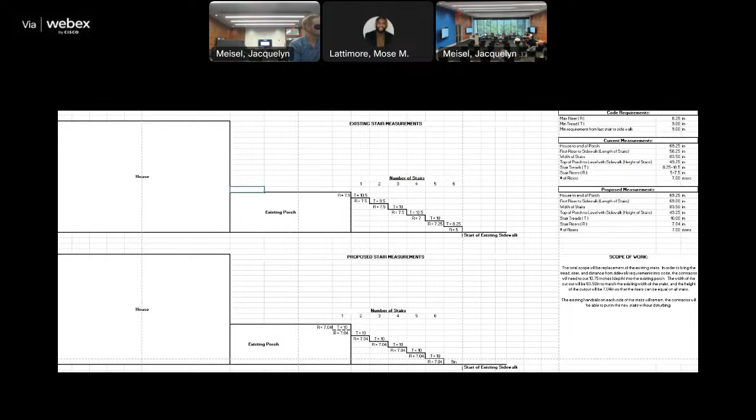So in this meeting, the question was, is that stone or is that laid brick, what is that? The facade behind those stairs. There's the images, the current condition images, from that far left, top picture. We were just trying to understand the materiality of the skirt of the porch, the walls of the porch.

We get it that it's a rental, we get it you're trying to maintain your cost, but what does that plinth that whole building sits on, what is the facade of that, is that just stone, is it concrete block? The house itself sits on sandstone at the foundation, and the whole porch is all concrete, and it looks like there may be some concrete block as well.

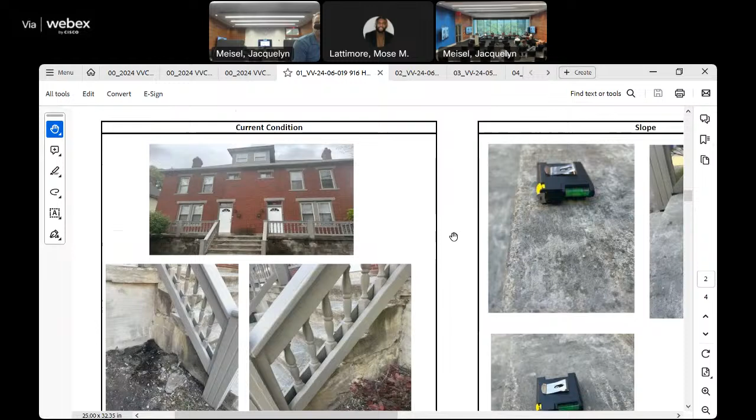If you look at the top picture, it looks like stone, but the detailed pictures look like it's not stone, it's concrete, because there are cracks and block, like if you go to street view. So I guess what is the current condition, is it a concrete block, is it acceptable, is it not acceptable, putting money into this building, what are we doing?

I would say, do you have the additional photos? I don't believe I added those in. There was a good picture of what the sides of the porch look like now compared to that.

So I think what we're trying to do is look at this holistically. I think we understand the life safety components of this, but as you introduce the new, is it appropriate to just leave behind the balance of it? Not necessarily replace the entire porch, but is there a possibility of extending a few dollars to improve the balance of the skirt?

I think that's what we're trying to show with these pictures, as long as it's okay with the commission. Now we see this picture where you definitely see the water table wrap around and connect to the porch. I'll see if I have one on my phone you could zoom in on better.

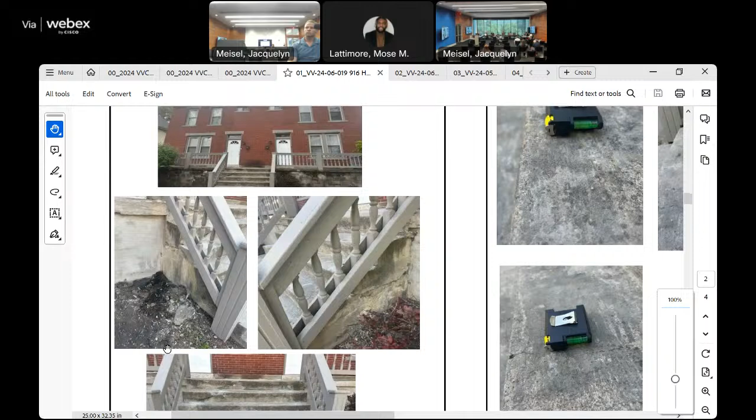Awesome, if you can zoom in on the current condition at the first page, the middle left image. The other thing that's looking a little bit weird is there's kind of a faux cap condition with the decking, the top slab, where the stairs interface with that.

Yeah, the railing isn't code-compliant, so there's just a bunch of weird details. And, you know, I see it's patched, I see it's painted. Is the paint color the same or close to the water table? When they skim the top of this, overall, this could either look really great, or it could look like a rental property that someone just fixed the safety issues and moved on.

And as we treat everyone the same, it's just, I'm not seeing information that substantiates what's gonna happen.

Understandable. So there's a couple of things that stand out to me, and I guess Kimberly, did you try to research any historic photos of this building? I don't think there's too many available in the file. If I remember correctly from doing the staff report, we don't have anything that goes back showing a different set of stairs and a landing.

Yeah, I mean, because what I'm getting at is that this appears not to be original, right? If you look at the facade of the building, well, there's that, the concrete block as well. The facade of the building implies there's something else going on, possibly a covered porch even, but I think we need to understand the context. There's no photos, so we're still limited.

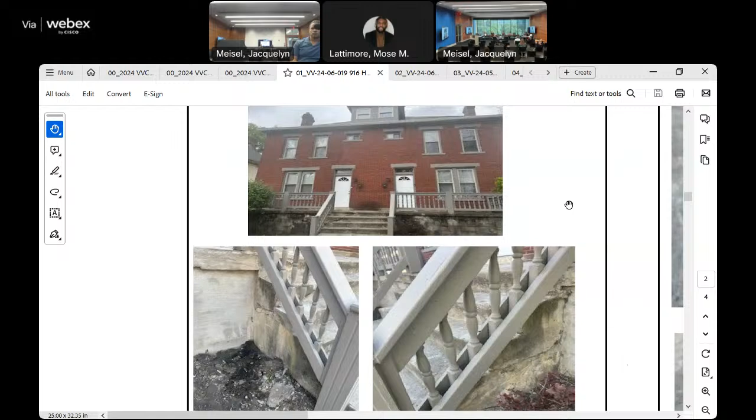Right, so I'm writing things down. Anything else, Pete, from that perspective that you can see that you're troubled by or that you think you need additional clarity on? Okay. Anything, Tim? Yeah, anything more as well.

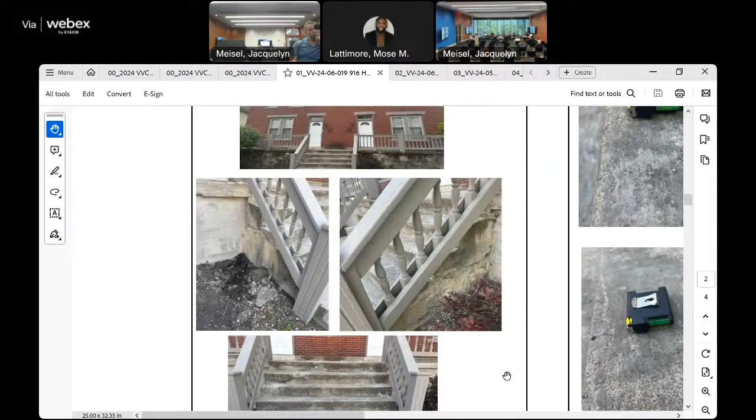Okay, sure. So I guess the concerns in terms of details of the railing, Melinda has a great point, I know the contractor mentioned the hope, but with the new work, it probably will be inspected. And so just being able to address that and what that condition may do, because it's not code compliant now. As soon as you have it inspected, they're gonna flag it. Got it, that's a great point.

And then the transition at the slab, I think pretty much all of us had that same concern, that's what came up in the business meeting. It's kind of that transition there. Is there a possibility of getting some additional detail related to that? We don't necessarily want to say you've got to pour the entire slab, but it seems like that's kind of potentially what may happen if you start to cut and all of a sudden that is all hollow, which it should be hollow.

So how is that transition being accomplished? I think that's the concern here, the integrity of it in the future, thinking about it falling, like a small slab that's depressed, that's new.

So with the compaction over time, will you as the homeowner start to run into issues with that falling and opening up a gap between the existing slab that's no longer supporting, because it's not bearing on the outside perimeter, right?

I think we're trying to guide you through some of the other questions you may want to ask the contractor to give you a better sense of comfort, which would give us comfort too. I can ask him what his plan B would be if it is hollow, and follow up on that. Realistically, if there isn't, I have the option to just leave it as is, correct?

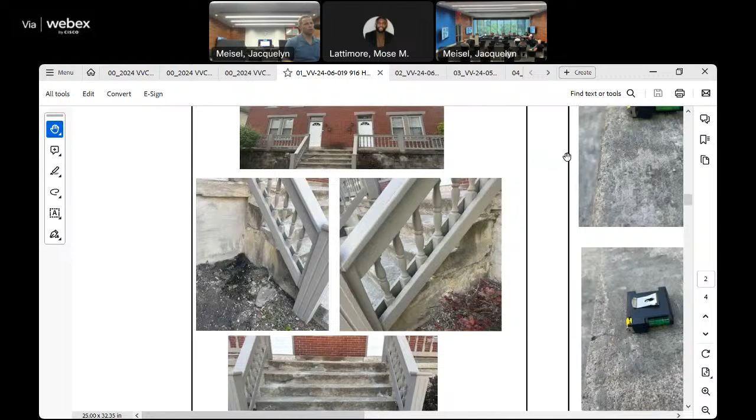So for Claire, for the follow-up: where that little curb meets the stair, clarity on that, clarity on Plan B if it's hollow, what are we gonna do, and then the handrail, which probably just means replacement. Okay, thank you.

Thank you, sir. Really appreciate it.

All right, moving on to application number 2, 851 Neil Avenue. This application is to add a new wrought iron fence with gate on top of the previously approved retaining wall, along the front yard.

The commissioners at the business meeting wanted to know how far back the proposed fence goes from the stone. This can either be noted on the drawings or an updated drawing provided. They also wanted the height of the fence confirmed, as well as the combined height of the fence and retaining wall. The applicant has clarified that the fence would be 28 inches above the ground, and the wall was approved at 21 inches, for a combined height of 49 inches total.

Staff recommends approval of the application with the condition that the updated drawing be submitted to staff prior to issuance of the certificate. Basis for staff recommendation is City Code 3116.13, the standards for site improvements.

Thank you, Kimberly. Can you state your name, sir, and get you sworn in? Yes, I'm Jesse Bianconi. Do you agree to tell the truth and nothing but the truth? Yes. Thank you, sir. Anything you need to add for the application? I don't think so. That's pretty cut and dry, so that's awesome.

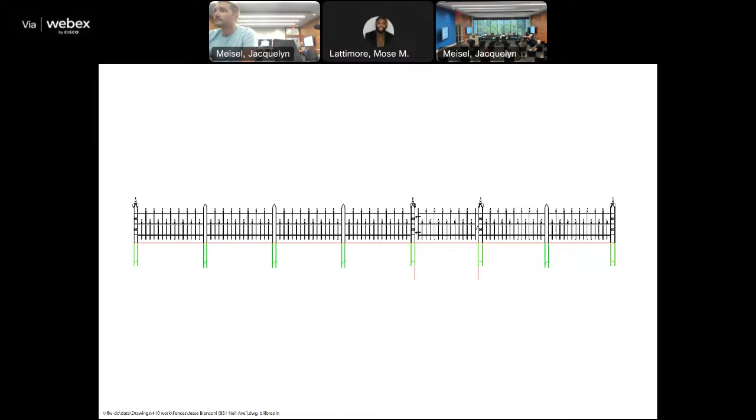I think it would be a much better condition if it were set back, right behind the tree. One, I think it's better for constructability, and two, to minimize the impact. I know there are a lot of conditions throughout the neighborhood that do this, but our concern is we get so many properties that have this very imposing total height of wall and fence together. This strategy of setting the fence back a little helps ease that visual barrier between the public face and the property.

So what would you suggest for the distance to set it back? Behind your existing plantings, I think that would be a nice solution. It would be appropriate where you have two plus feet to kind of knock down that edge and still achieve the enclosure you're looking for. It may work better with the stairs too, because right now it's stepping back to have the gate. You may want to push it farther so it's all one face, though I'm not sure that's a good thing either, but the play with the stairs is worth considering.

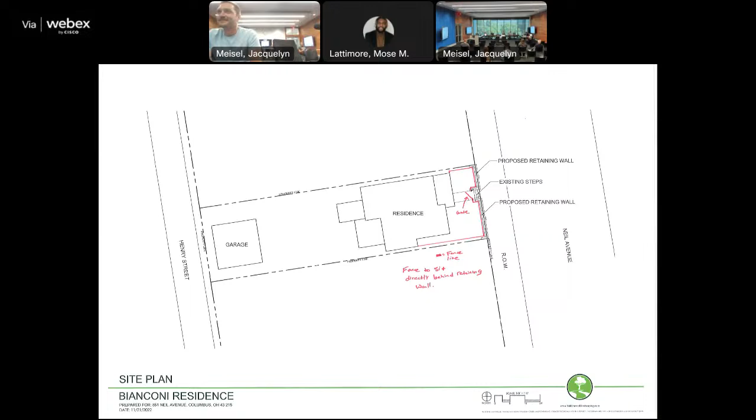Motion for VV 24 06 020, 851 Neil Avenue, as approved as submitted with the condition that the fence is set back from the wall, range of 18 to 24 inches. And updated plans are submitted to staff.

Is there a second? Second. Any further discussion? No. All those in favor say aye. Aye. Any opposed? Motion passed. Thanks so much. Thank you. Good luck.

All right, moving on to application number 3. This is 174 West 4th Avenue. The application is to remove the existing rear deck and construct a single-story addition measuring approximately 12 feet 8 inches by 14 feet 8 inches. The addition will have a flat roof, a single double hung window on the east elevation and 2 double hung windows on the west elevation. Siding is to be Hardie board and batten with a 12-inch spacing. Windows would be Marvin Ultimate, door would be full light Vistagrain fiberglass, and siding to be smooth Hardie panel vertical siding. I have included the commissioner comments from the May 8th hearing.

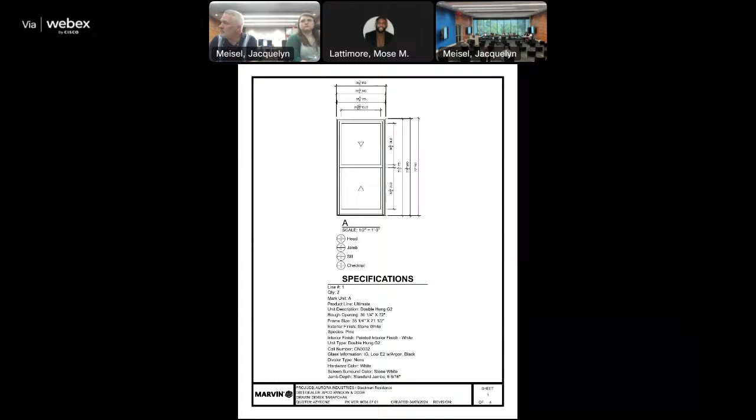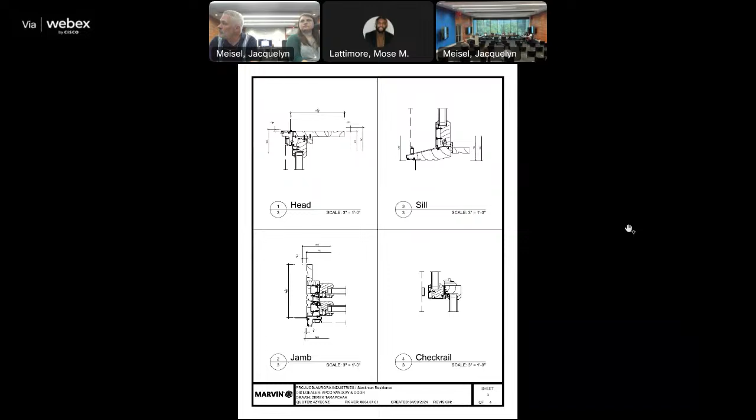Commissioners at the business meeting were curious if the existing piping downspout across the rear of the house would be cleaned up with the new addition. They requested a full site plan with property line, sidewalk, driveway, etc. If any other improvements such as landscaping were going to happen, they would prefer to review it along with the addition. The applicant did confirm, and those drawings should be included in the materials. Staff recommends approval of the application with any and all clarifications to be submitted to HPO staff prior to issuance of a certificate. Basis for recommendation is City Code 3116.11, standards for alteration; City Code 3116.12, standards for new construction; and the Victorian Village guidelines regarding new construction.

Awesome, thank you Kimberly. Can you guys state your name and get sworn in? Pete Foster? Lily Steckman? Okay, do you both agree to tell the truth and nothing but the truth? Yes. Thank you. So is there anything you're going to add to the application?

Really, we just took into consideration the conversation we had the last time we were here, and we made the appropriate adjustments, so we're back. I think the question about the downspout at the business meeting - the mindset was probably that it was uncovered, and that's what the team understood it could be. But I think everything that was a concern has been addressed. As far as the landscaping that was being proposed, I just want to give Tim a moment to digest that and ask any questions. Yeah, that was it, that's all.

So, very clear plan on general material - everything's kind of listed as existing. That's just a concrete patio and a concrete sidewalk is what we're going with. There's an existing paver walk in the front, and that walk breaks off to the right and goes down the east side of the house until it hits the gate. Then we were going to transition to concrete - the desire is to transition to concrete. That transition would happen where the dash line is, right behind the fence, behind the gate, as you go plan north. Okay, perfect.

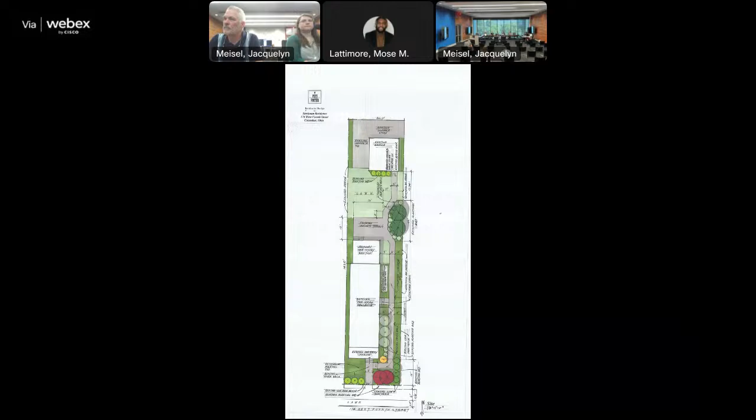All right, awesome. Okay, is there a motion?

Motion on application 24-05-017, 174 West Fourth Avenue, to approve as submitted.

Does that include the updated landscaping? Yes, including the updated landscaping.

Is there a second? Second. Any further discussion? All those in favor say aye. Any opposed? Motion passed.

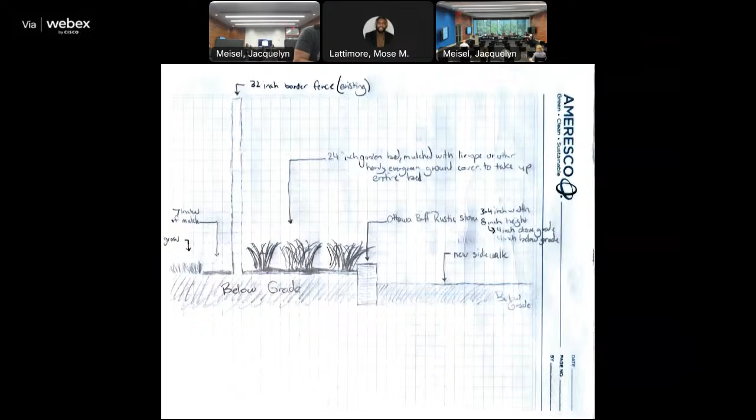Do you want me to write in where it dies into the yard? You guys are gonna write that into the continuation. Should I write that into the stuff I submit as well, or once it's in, do I need to communicate that or not? I don't think so, I think we clarified it would be part of the motion. That's correct. Okay, thank you so much.

Appreciate it. Although I might have to say, since Tim's been doing all these motions, someone else might have to do it next time they get a break. The last one, yeah, I agree. The awkward pause, yeah, thank you.

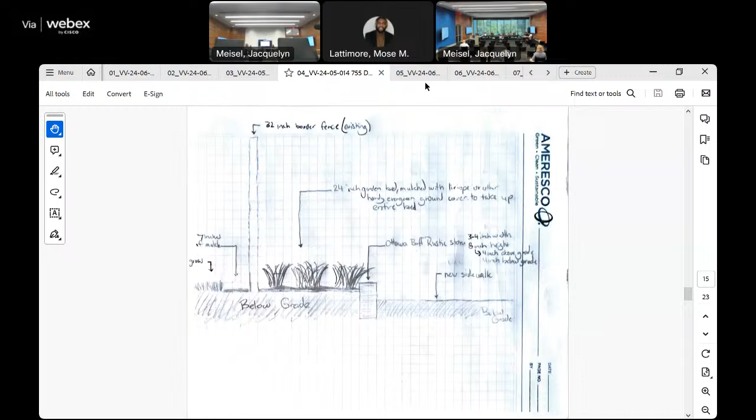All right, application number 5, 111 Price Avenue. This application is to replace the existing front doors with Palmer Donovan fiberglass wrap doors and a full glass sidelight, and to replace the metal full light doors in the kitchen and dining room with Palmer Donovan fiberglass wrap full doors.

As such, it is our recommendation that the original doors are retained as a contributing architectural feature. Staff recommends continuation of the application to allow the applicant to revise it to better follow code guidelines, based on City Code 3116.11, the standards for alteration, as well as the Victorian Village guidelines regarding windows and doors.

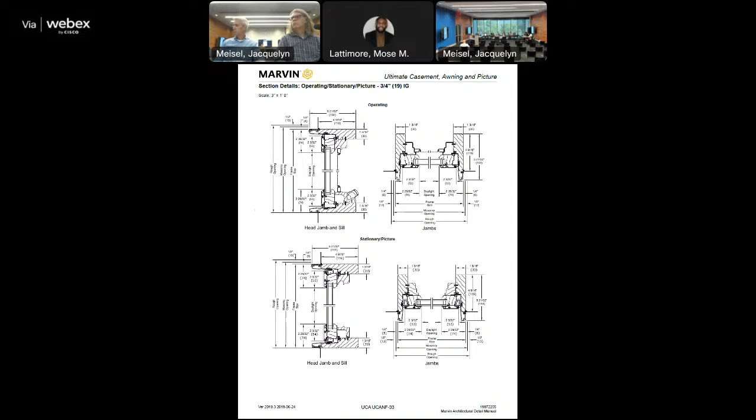I have added the minutes from the April 10th hearing to the meeting. Commissioners at the business meeting noted that the application looked complete and they needed no additional information. HPO staff has added the 1901, 1921 to 22, and 1922 to 1951 Sanborn maps to the materials, which show that both single-story additions to the property are historic and contributing. HPO staff supports the addition, but not the proposed alteration to the historic openings. The applicant also submitted some additional photos of the windows, which they are proposing to replace, as well as...

I was gonna say this is fantastic. See, there we go, the screen just blanked out a little bit. And I got this uploaded today. I was gone for the past week, so they submitted last week on Wednesday, so it was one of those, you just missed me by a little bit.

From a preliminary quick look, it appears that a lot of these windows are old, but they're not original. The ones that do look a little bit older appear to have a little bit more decay. I did not get a lot of time to look over these in detail, and just to note, it's not on the agenda as noting that the doors and windows would be replaced, but it was part of their original application. So if the commission is comfortable with the last minute look at the materials and voting on them, staff's okay with that, but if we would like to do a site visit or any additional work, I'm okay as well, as long as the applicants are okay with that.

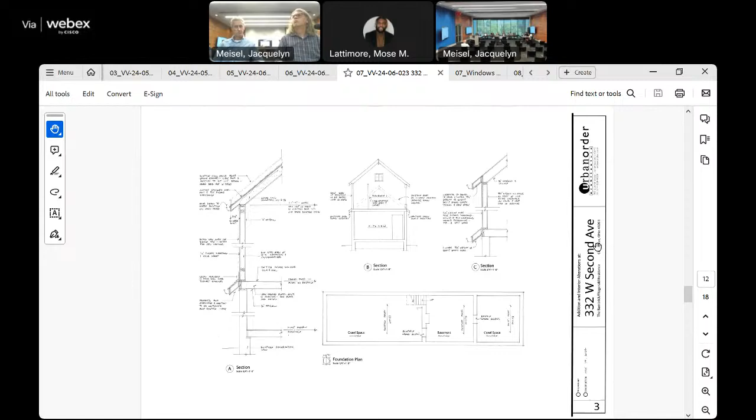My original recommendation was to approve the application with the condition that the historic opening is retained, and basis for recommendation, City Code 3116.11, the standards for alteration, as well as City Code 3116.12, the standards for new construction, and the Victorian Village guidelines on new construction. And Sean, I'll let you swear in.

Okay, thank you. Can you gentlemen state your names and get sworn in? Dean Burlong. Steve Hurd. You both agree to tell the truth and nothing but the truth? Yes. I do. All right.

Yeah, so like Kimberly said, we were here I think in April, talked about this, presented it conceptually, went back and forth on the openings and the scale of the addition and how we stepped it down from the original house. The general consensus from the commission was that it was a positive direction and changing the openings on the back seemed okay. We didn't talk about the windows at that point, but our client does want to replace those windows, and as Kimberly said, a lot of them are replacements. I'm happy to meet with staff and walk through, look at that if you guys are okay with that, or we could bring it back. It's just really up to you guys.

So what you're thinking is that the doors and windows can be pulled out of advancing the application today?

Yeah, they could be if we need be. Especially since when I sent that, I didn't know you were out, so I think you guys didn't get a chance to see it. Kimberly, is that an option of being able to just pull that out? Would you feel comfortable pulling it after the application? I would be, if we want to split it and continue that part.

Okay, I just wanted to be sure before we got too far. Yeah, the rest of it has been vetted, I think. That's why I wanted to turn over to commissioner comments and see if there's anything related to item A, which is going to be the overall project itself, minus the windows.

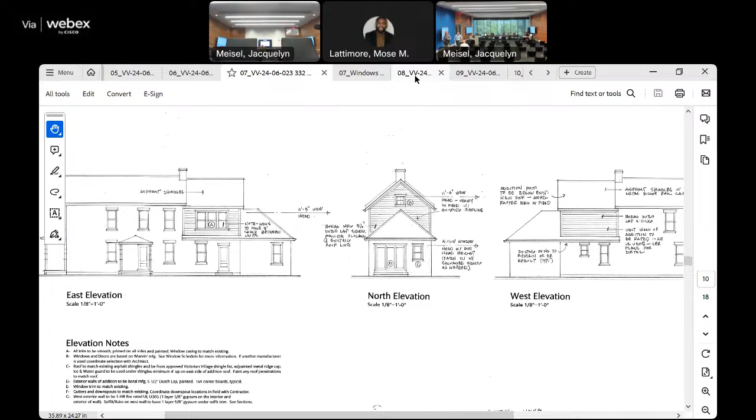All right, thank you, thank you for talking it through. Yeah, and I'll reach out as early as I can to schedule the site visits. It sounds, I'm sure you're small, so we'll figure it out. And nobody lives there, so we have the access for the next business meeting. Okay, that's perfect, so thanks. Thank you, thank you. All right, rolling right along to application number 8.

This is 938 Hunter Avenue, and this application is to remove the existing cedar shingle siding and replace it with James Hardie siding, 7-inch steel in cedar mill color, with Arctic white trim around windows and doors that weren't recently replaced. Corner boards will be Arctic white, with standard doors, windows, door heads, sill flashings, and new standard mounting blocks.

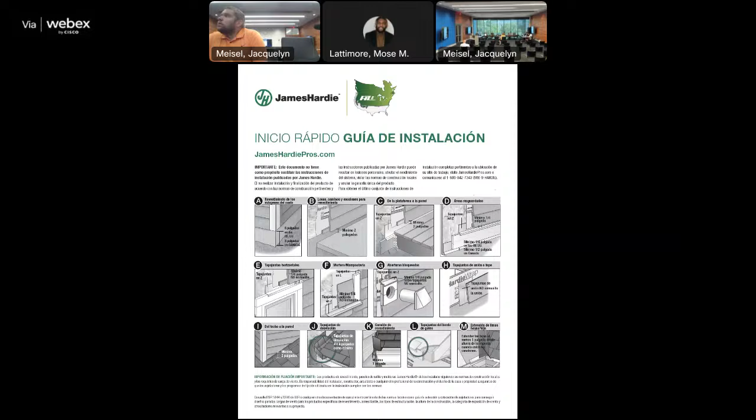The commissioners at the business meeting suggested a larger test area to evaluate the original siding conditions submitted. Commissioners noted that going back to the cedar siding or dimensions of the original siding, typically a board and batten, were typical requirements for siding replacement, but noted that before they could consider replacement, they had to evaluate if the existing or original siding could be restored.

HPO staff conducted a site visit, and from the test patch it did appear that the original wood siding is in good condition. Staff would recommend either repairing or replacing the cedar siding, or restoration of the original siding. Window trim on a portion of the building has been replaced without approval, and the applicant is working with staff to resolve the work already completed. I'll note there are a couple of communications in my queue that I need to get back to him regarding that topic as well.

Staff does recommend continuing the application to allow the applicant to conduct a test patch in another area to verify the condition of the original siding. The basis for staff recommendation is City Code 3116.11, the standards for alteration, and the Victorian Village guidelines on siding.

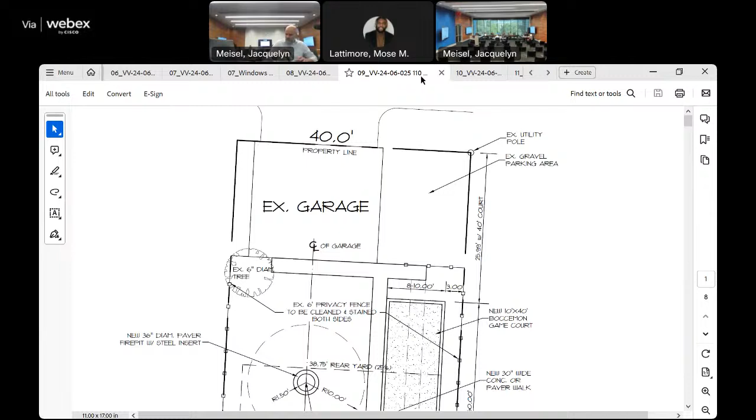Jeff, we'll give you a report. Y'all get distracted, you don't focus on the applicant nearly as much, and I'm not saying you individually, but in previous iterations it has not done well. Previous commissioners, I will follow up with you, I'll try to save some of the goodies. Beautiful, thank you. All right, but it's been a pleasure, Commissioner Hisson. Thank you, I've enjoyed all 27 years. Oh, I'm sure, all the ups and downs. Yeah, absolutely.

Okay, so for application 110 West Second Avenue, the request here is for landscaping: installation of a 13 by 13 foot paver patio and a 13 by 13 foot prefab gazebo structure with a hot tub, that would be below the rest of the existing deck, per the submitted documentation.

We'll be installing a new paver or concrete walkway and removing the existing walkway, and installation of a bocce game court.

That bocce court would be constructed out of 2 6x6 foot pressure treated stacked lumber with 24-inch number 5 rebar at 6 feet on center and a 2x8. The infill would be clean crushed rock and perforated drain pipe, overlaid with landscape fabric, with the addition of a 3-inch layer of crushed limestone and topping with 1-inch oyster shell blend.

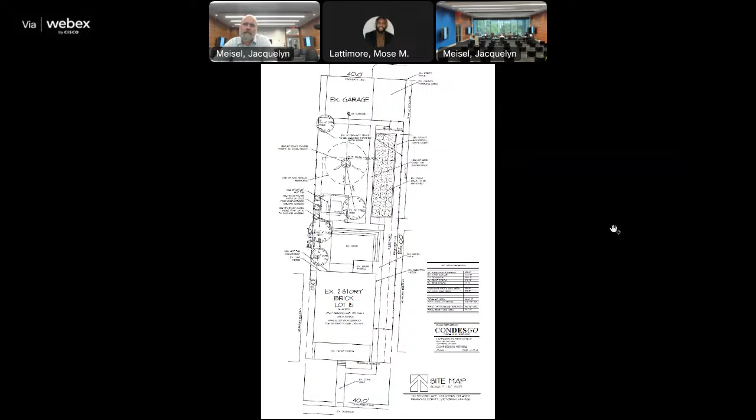100%, makes sense. I think the other thing with something like this, it's a structure, so seeing it in relationship to adjacent structures, a second elevation of the house next to it, what is its proximity to the neighbors, those are really the critical things for evaluation of its appropriateness, in addition to material.

That's very consistent with what we evaluated last time. I think the things we pointed out about why looking at those types of drawings helps the homeowner understand some of the complexities they were proposing. Not to say this case is the same, but it helps the evaluation.

It's not an umbrella covering your hot tub, it's actually a structure, which triggers a whole bunch of other things. So, anything else? We addressed the gazebo, was there anything related to the hot tub? It didn't seem like it was.

I think that was just more product data, but that's been offered. And then the site plan materiality in terms of the bocce court, is there any concerns about any of that?

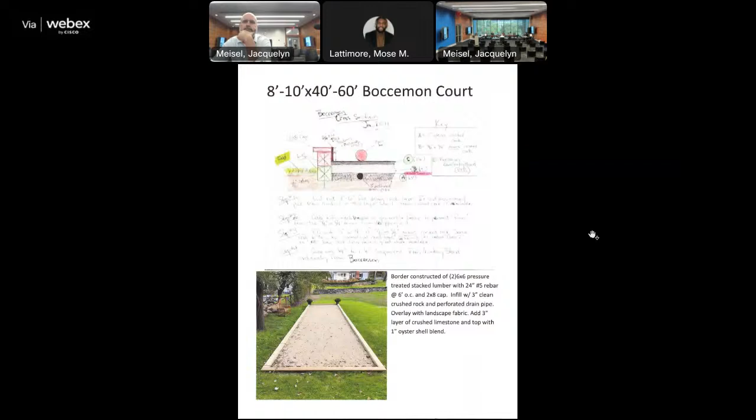The only comment I have is about the pressure treated wood. We usually say no on the pressure treated. But this still is black. No, it's stained black here. Okay, oh, so you have the one, okay.

And what it's for, I agree. I just want to make sure we're not doing anything out of it. Right, yes, of course. You could theoretically just line the inside with wood for the bouncing, you know. They put stained black.

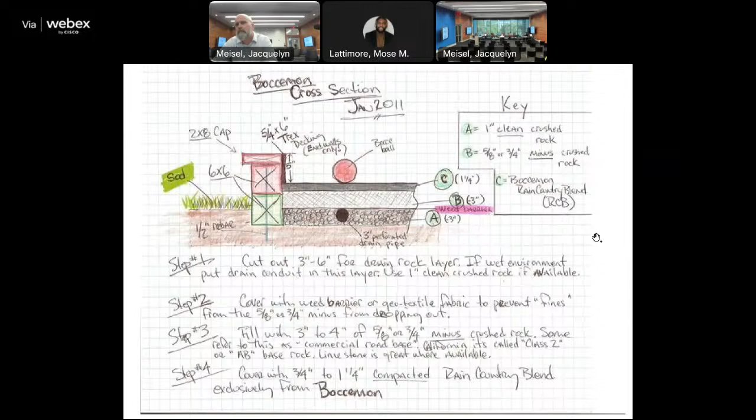My only observation on the site plan is that the circular area for the fire pit, its relationship to that adjacent walkway, is a little awkward. You kind of get some weird leftover spaces. So if this is going towards a continuation, just consider what that connection is between that space and the adjacent walkway.

So is the best path a continuation to allow you to work through those items? So your request is that I do full elevations of the existing house with the gazebo? I don't want full elevations, I think it's more so a scale relationship of the elements. It doesn't need a lot of materiality from that perspective. It's about allowing us to understand the relationship of the mass of the thing against the home.

So however you can best communicate that, I think is beneficial for us. Is the elevation of that neighbor where the hot tub is just a solid wall with no windows? Is there a window right in front that they're gonna have to look at the structure? Just basic context of where that thing lies.

Some images of the adjacency may be helpful too, the property line, or a fence, and being able to understand the scale of the homeowner's home is what we're trying to do. So if I superimpose the image of that gazebo onto some photos that are already available?

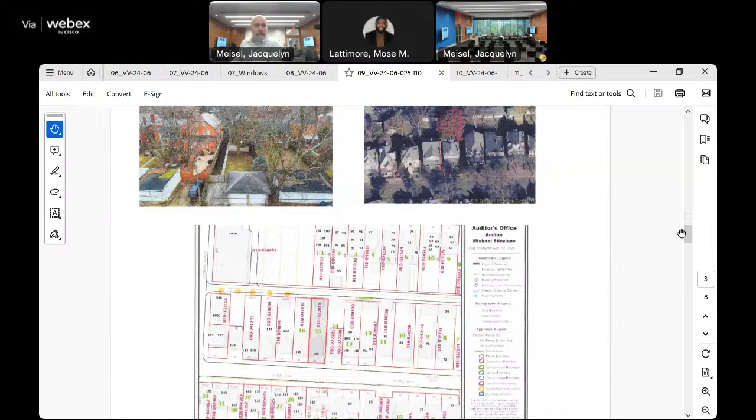We talked about the bocce wood, but I don't think the bocce court's being stained—I think it's just the fence.

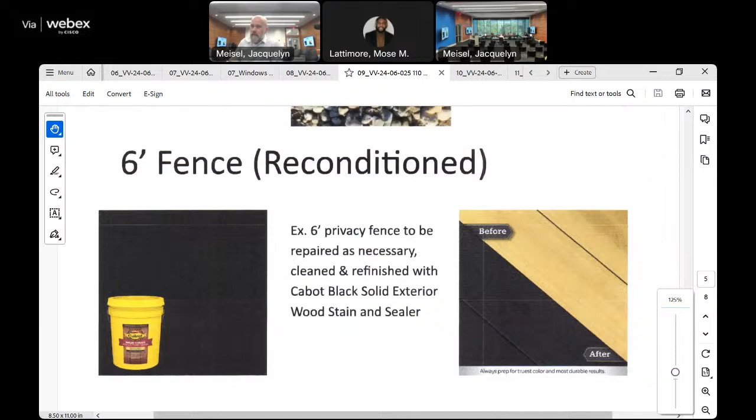In the application, what was referenced was the repair. I don't think the paint was mentioned—maybe it was, it said it in the last bullet. The intention was to do both sides, including the side that faces your neighbors.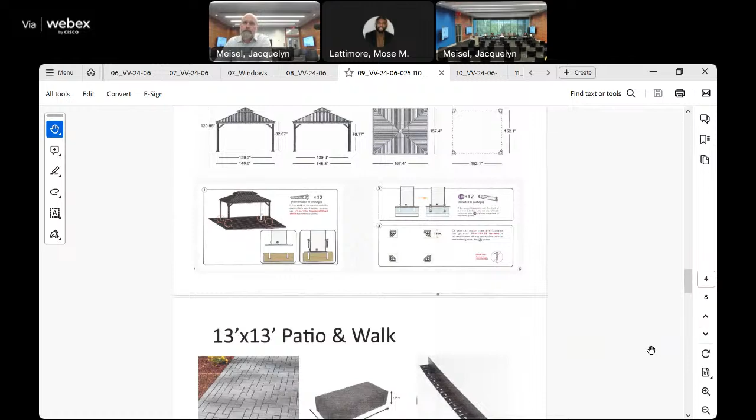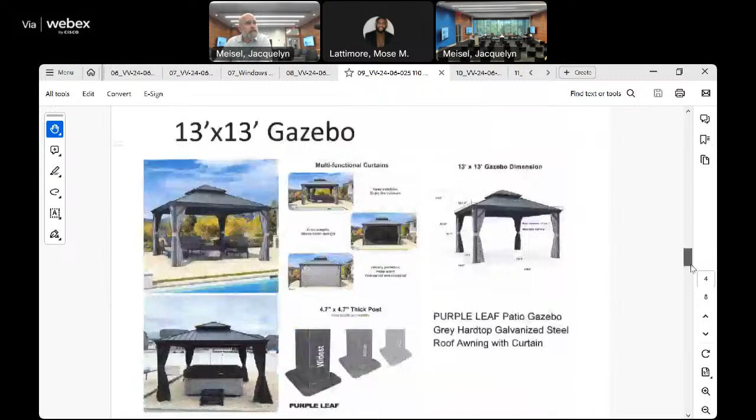No issues with stain, but that dark color—I don't think there's any wood with a solid stain like that, it seems a little intense. Just trying to think if there are other examples.

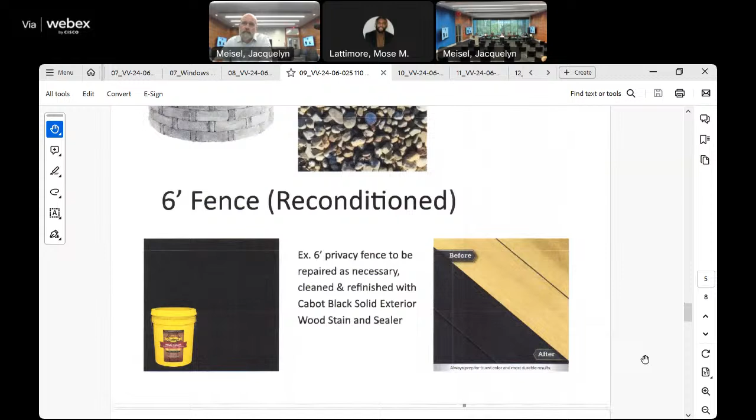Can you help us with an alternate to that solution? Thank you for pointing that out. I think some of these things are just new for us from that perspective, so I appreciate you navigating this.

I think an alternate would be helpful for us. I think the staining is appropriate, and I think staff would echo that, but it's just the depth of the color. If it got to that point, the stain is something we could pass off to staff.

Ultimately, we could approve it being stained, then refer the appropriate color to staff. My gut is that black would probably be too much. I agree.

Good, you got it—I think we touched everything. I think so. Okay, thank you.

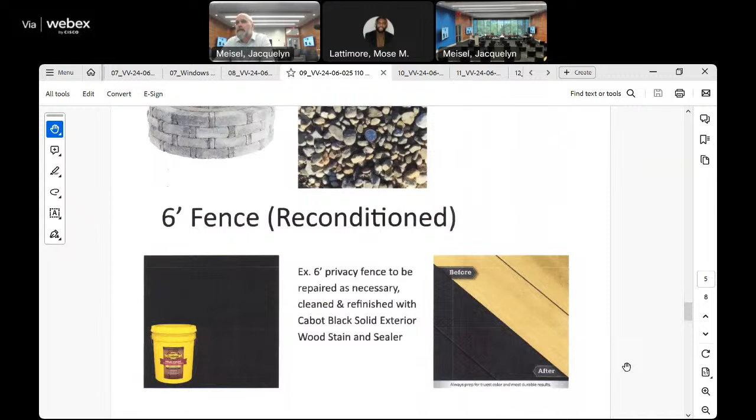Is there a motion to continue? Motion on application VV 24 06 025, 110 West Second Avenue, to continue the application. Is there a second? Second. All those in favor say aye. Aye. Any opposed? Let's continue. Thank you.

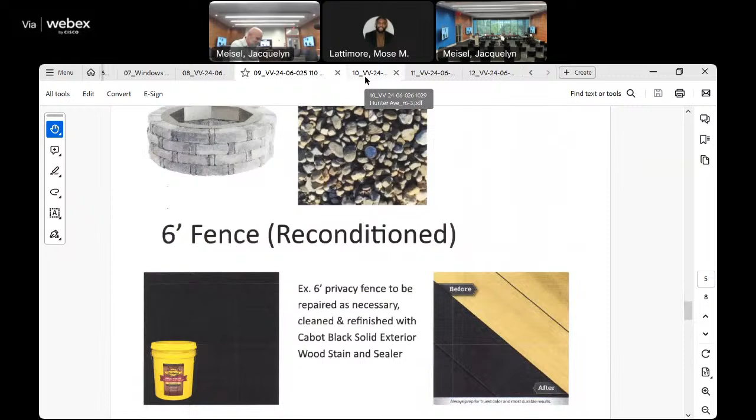Kids, I'm leaving, good luck. I don't want to stay through the rest of the meeting. I told Kimberly I'm taking this—I'm pretty sure he said he'd blow it up. I'm gonna have them on, I might even do my Christmas card, maybe make note cards, I don't know. Well Jeff, good luck you guys, thank you for your service. It's been a ride, I truly appreciate it. Always hear good things about it. Bye you guys. Jessica, you won't have to deal with me ever again. Thank you guys.

Moving on to application number 10, 1029 Hunter Avenue. The proposed work is to remove existing asphalt siding and restore the original wood siding underneath, and to construct a new two-story addition on the rear of the house, demolishing a portion of the historic house for documentation. The addition materials would be HardiePlank lap siding, Pella Reserve traditional wood clad double-hung windows, CertainTeed Carriage House shingles in Stonegate Gray, and ogee style gutters. At the business meeting, commissioners noted the application was complete and needed no additional information.

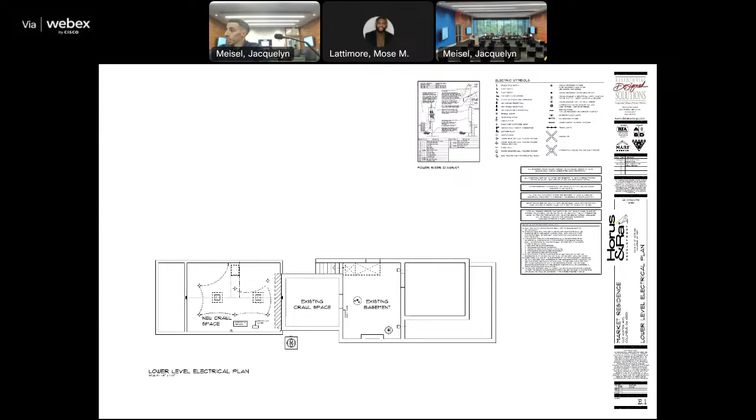Staff has additionally added Sanborn maps, which help show the location of the historic addition. Staff recommends approval of application VV 2406026 at 1029 Hunter Avenue with the following conditions: that the addition is lower than the height of the original structure so that it is subservient, to be consistent with city code during construction, and that the historic addition is retained.

So the basis for the staff recommendation are the city code 3116.11 standards for alteration, and I think that would also include the standards for construction. And with that, I'll turn over to the commission.

Thank you. Can you state your name, sir, and get you sworn in? Yes, Kareem Ammer. Do you agree to tell the truth and nothing but the truth? I do, yes. Thank you, sir.

So I know at the business meeting you were present, I think I remember, right? Is there anything that you want to kind of talk through related to the application and the thought about staff's recommendation of the historic addition being retained?

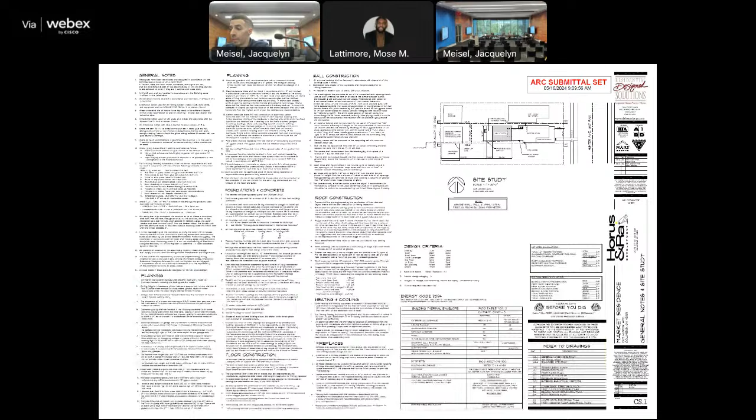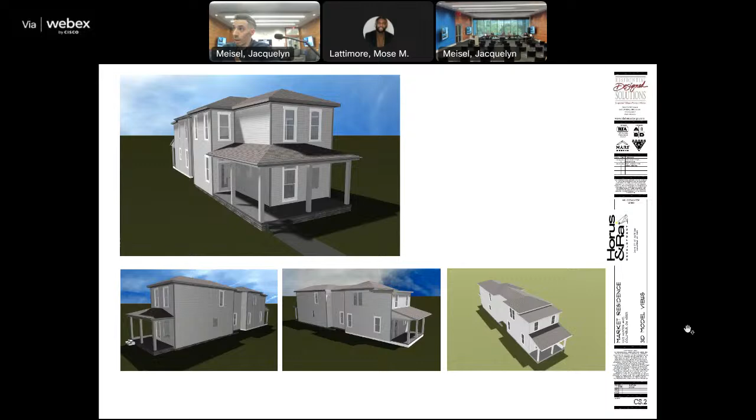Sure. Yeah, just to provide a bit of context and talk this through since the last time we were here. We were here a few months ago, I believe, bit of new faces since that. So again, to provide some context, this house as it exists today is vacant, distressed, has been for a while. Our previous submission showed some pictures of the interior, and while that's not up for consideration, it shows just the true condition of it. It's really a heavy lift to bring this rather sad house back to life in this neighborhood.

Siding that exists today is asphalt shingles. That's not the original siding. We'll be restoring the lap siding underneath, again trying to bring back some of that original character into the neighborhood.

With this submission, we really cross-referenced all the constructive comments the commissioners gave us at the last hearing. Most notably, I think the one that resonated with us was that our last submission resembled that of a semi-truck, and we took that to heart. I think the architects did a great job with this submission, adding more hips to that addition that are in line with the original house, more of a distinction between old and new, and making that rear porch more in line with the character of the original house.

So again, really no gimmicks here, just trying to incorporate the feedback that was given to us to the best of our ability. That condition, I guess, is new to me to hear. I didn't receive that in the feedback in the email. I guess if we don't mind talking that through, the implications to the design we have today - what that means. So we're asking for the height of the addition to be lower than the historic addition, essentially that portion in between there in the middle. Or I guess any clarity on that condition, just so I know for certain.

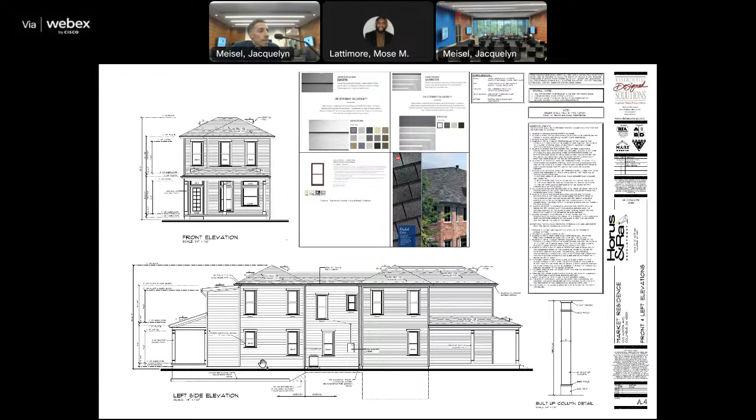Understood, right? See the top of that window, well, the whole window is... So I guess that is in the existing, but on the drawings it says that's being reframed. And if it's an existing window, it's lower than... Looking at that side, the window is getting slid over from where it exists now. So if it's being slid over, then the head height should remain the same. If you look at page 20...

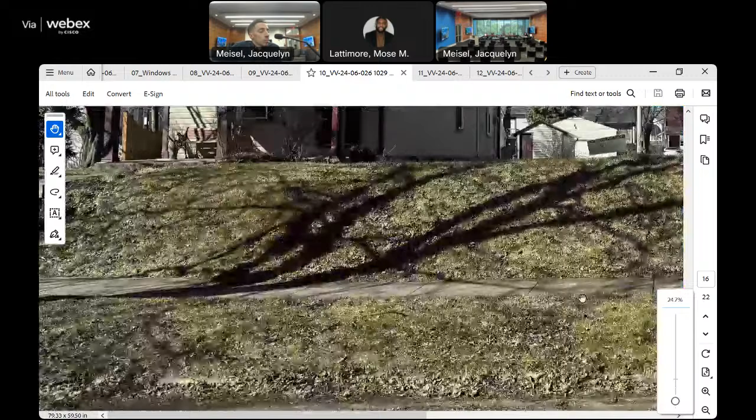There's a picture of that facade. Is it all the way to the left? See how the head height... yeah, it's the same, is higher. So maybe there's just a problem with the drawing. But the head height wants to be up. Yeah, I agree. Well, that back roof, I think, slopes down and that window is lower.

But is that roof being reframed? Yes, but the window is not being reframed. Yeah, it is, on the drawing it should be. Oh, because it's shifting. Okay, jeez, all right. That's understandable, it's a good observation. Oh, right, I see, okay.

So I think that we have the window elevation on the existing. We talked about it, it does meet the intent of, I guess, stepping down or identifying a sense of separation from the existing standalone home. Do we need to talk about anything else related to the application, siding? The addition or the historic addition? The addition, the historic addition, there we go, thank you. So the historic addition, any thoughts related to that? I think staff's recommendation is that the historic addition remain.

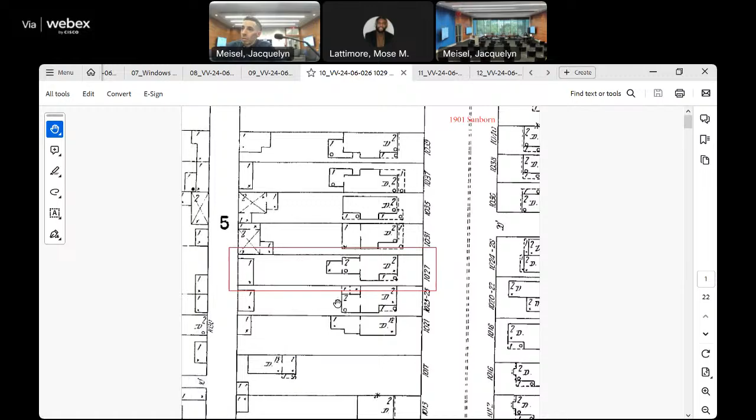Okay, that doesn't exist there on the structure today, I don't believe. It's in the pictures, is it not? Not the one that's on the 1901 Sanborn, but... Well, that's the funny thing. It's on the earlier Sanborn, but not on the later Sanborn. Well, yeah, that's odd.

I don't believe there's just the one story. The second Sanborn is the right size, whereas the first one is much deeper than what's currently there. Yeah, so it looks like it was probably replaced with a porch, and then the porch was enclosed.

I can see that. So I think if we're looking for a justification, it's part of the house that has seen a lot of change over the years. That's right. I like that, and that they're keeping it 90%. Right. Well, and I don't...

I mean, in terms of this addition even fitting in with the style of the house that it's on, with the window, the style of the windows and the doors, it's not even complimenting the building as is.

That gets us close enough. Yeah, I mean, I think that we're going to have to say something like that in the motion, just from that perspective, just to give staff an understanding of why we're making this determination.

Yeah, which is very confusing. Yes, it is. Does everybody have clarity now though? This is a big... I don't want to force anything on. Okay, yep, clear. Okay, so we talked about the addition.

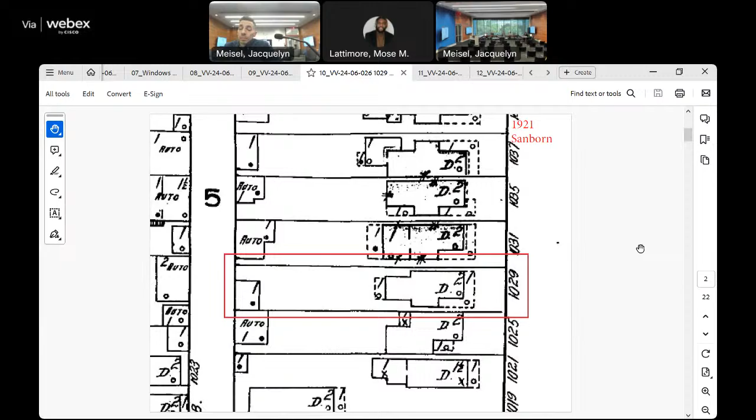The historic addition, we talked about this. Go ahead, I'm sorry. No, I'm sorry, I have one thing to ask, goes back to that window, just again for consistency. Right, we're not really infilling a window, but we're moving a window around in the historic part of the structure.

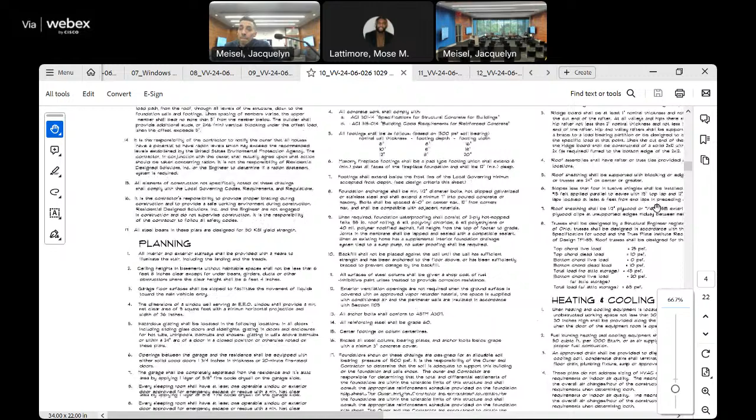Yes, so one is being infilled. There's one being infilled, one being added, basically. The one in the back, yeah, okay. And then the one being added, well, I'm talking about the one on the side. On the left side, yeah. It's being infilled and a new one. Oh, you're putting those as the same thing.

But there's also the elimination of the back window, if you count that, because it would be part of the... but it won't be visible. Right, right. So that one I can put to the side, but the other one, I just want to make sure we address it.

Yeah, that was the ground floor that I was referring to. So the ground floor will stay the same, but it's the second floor window that we were talking about. Yeah, that's the one.

It just looks off, because if you kept the window where it is, it screws up the floor plan. Yeah, because the windows are very close to the other one. Yeah, so it's getting infilled and a new one put next to it. Right, and the other one being...

One could argue that the rhythm looks better with the window relocated overall. If you just match the head still, it'll be fine. Yeah, that's what's throwing it off. Just want to push it back.

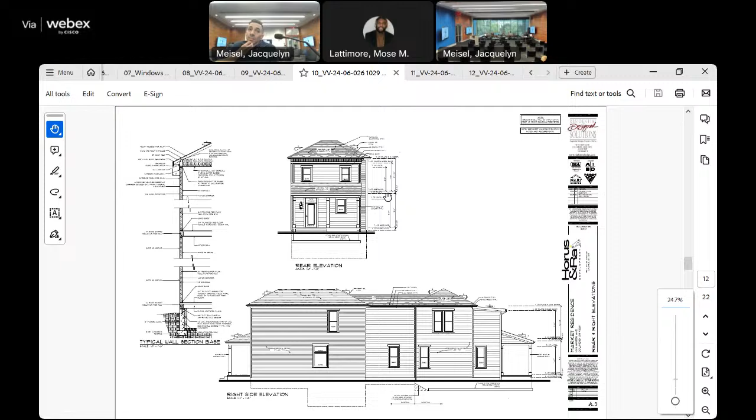So we talked through the historic scale of the existing versus the new. How did we get here on the siding? I don't know how we got to this one with the siding, but that was the thing I was going to bring up. We have to do something about that. I wasn't here for that first conversation, so I apologize.

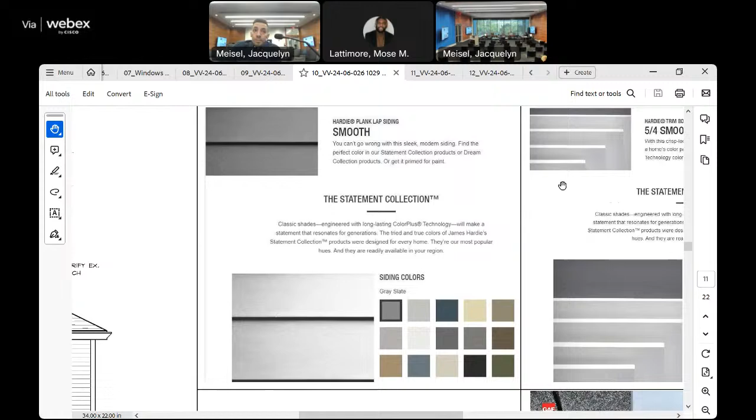As far as the siding, in your first application, did you guys talk about siding replacement? No, they're restoring the siding underneath. The new addition is different, still horizontal but with a different exposure, as a way of differentiating the addition from the existing. Is it enough differentiation, I guess? I like this better than board and batten, which is what's trending now.

You wouldn't have started in this neighborhood. Well, you guys are the architect, I mean... No, no, I don't know, I'm going to ask for clarity.

So can you just walk us through, for all of us, for clarity: the existing home is being restored, right? So the existing siding is coming off, there's lap siding behind it, and that siding is being restored, which is awesome. Can you walk us through what's going to happen on the existing historic addition of the home?

It's not as strong as having new siding. Correct.

Okay, so same location of the windows we had in question. We're showing that it's proposing new siding, yes, as opposed to the original. So that is new siding alongside the new addition portion.

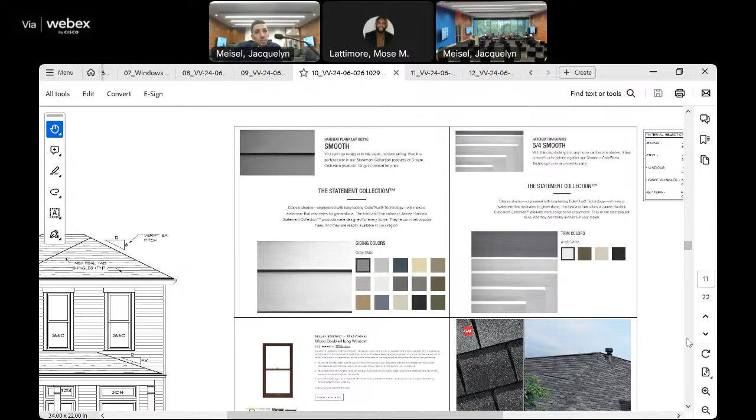I would be happier if it was the original siding, and if the reframed part can be made to look like it, I would be happy. You can still make it exciting, still give it something. And it would not be minimal, most of this. So make that change, I'm good with that, I think that's workable.

Okay, so I guess the consistency would be thinking about everything to the left of the existing home with the historic addition as part of the home, and everything after that is the new addition. I think that will allow us to be more consistent in what we're asking of the applicant. Is that right in saying this? I agree, yep, I think you are.

Okay, so from a restoration perspective, you don't really know what's on the back side of that, behind the asphalt shingles? There have been natural instances where we've been able to see behind it.

You know, very small windows. There is a chance we go to take those asphalt shingles off and there's a mess underneath, but from what we've seen, it looks like pretty restored. I think there was a picture in the last submission. I don't know if I made it to this one, but it looks like it's restorable. And that would, of course, be our intent, to restore to the best of our ability.

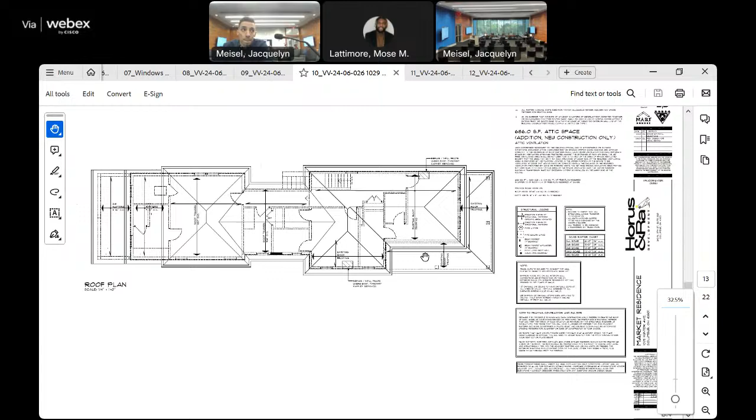One other item that I think needs to be provided is, I think I might have asked for this, is rear yard, if there's any sidewalk or anything that is going to be proposed between the garage and the addition to the porch steps. So just making clear that if there's any improvements to the site, site landscape change submitted.

Makes sense. I just want to ask the question, are we jumping the gun, or is there, like, it's starting to feel that way a little bit. I don't think so, they're very simple things. I'm hopeful that way too as well.

I just don't think that the landscaping, there isn't any landscaping that's being proposed, and so if there are improvements, then that has to come back as a separate application. Sure, absolutely, no issues there. So we're saying that we're not approving the landscape. No, whatever is on the site study right now. Okay, yes, sir, that makes me feel better.

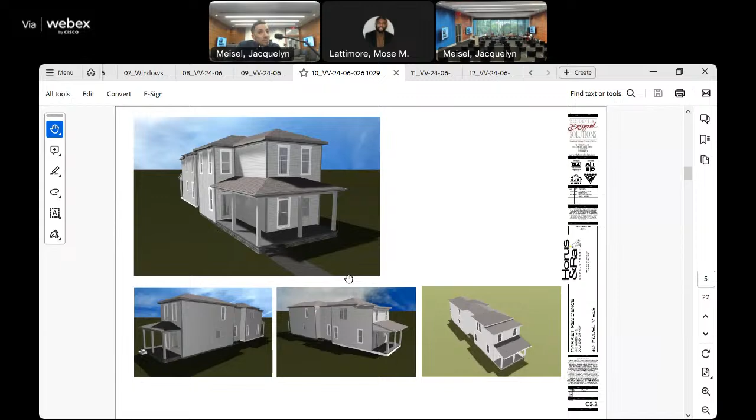Okay, the reasoning for the demolition of the existing addition, or the filled-in porch, or whatever you call it. Belinda had the notion about a lot of changes seen over the years, based upon evaluation of the Sanborn map and photos. It's been remodeled a number of times. So just because of the number of changes, which would compromise its integrity.

Thank you. Thank you. You're welcome. In fact, just in good time, just in time to add that little caveat. Oh, it's perfect time. Cool. Height, there's nothing to say there. No, I think we're good. Exactly, that's been addressed. And, you know, from that standpoint, it does. All right, am I missing anything?

Okay, let's get this a go. All right, motion on application VV 24 06 026, 1029 Hunter Avenue, to approve the application as submitted with the following clarifications and justifications.

The siding on the existing addition, between, I'll call it the pillars here of the house, will be restored to the siding that exists on the original house. If that siding is not there, that'll have to be installed to match, so that the original house stays the original house. In that same part of the original house, the window that is proposed to be relocated on the second floor should be raised such that the height of the sill and the head match or align with the existing house and the proposed addition.

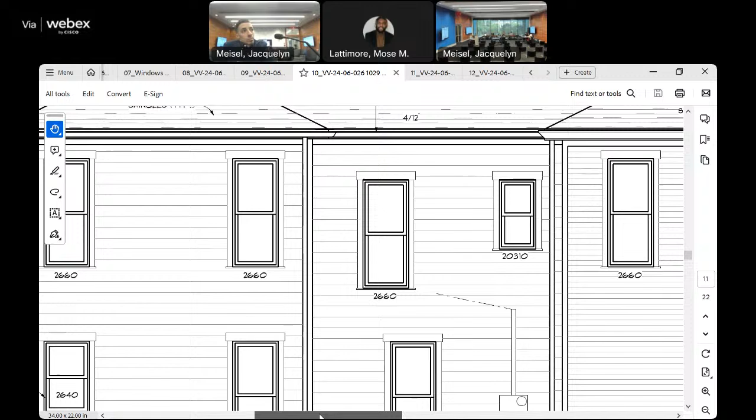We are not approving any landscaping or site improvements as part of this application. So if those are proposed, those will be submitted separately. We do know that the application includes a demo of a small addition, which appears to be an infill porch. And that addition has changed over the years based on the Sanborn maps and its current condition, and that those number of changes compromises its historic integrity, and that we don't have an issue with that being demolished as part of the work being done.

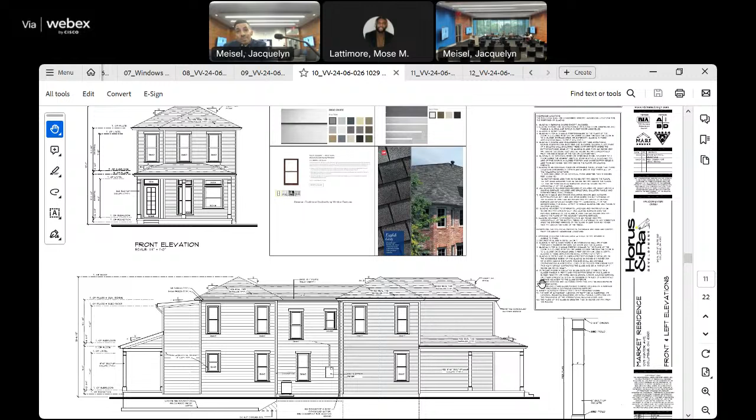Good, awesome, good job. All right. Is there anything else we're missing? Okay, sounds good, just a second.

Is there a second? Okay, any further discussion? All those in favor say aye. Any opposed? Motion passed. Thank you all, thank you everybody, appreciate it.

Thank you for all the support on those. Those are not easy, so thank you. No, it's fun, it's dialogue.

Very good, all right, moving on to application number 11. This is for 23 West Second Avenue, 951 North High Street. This application is to paint 9 separate murals on CMU infill windows. One window measures approximately 108 inches high by 58 inches wide, that's the northmost one, and the remainder measure approximately 88 inches high by 42 inches wide.

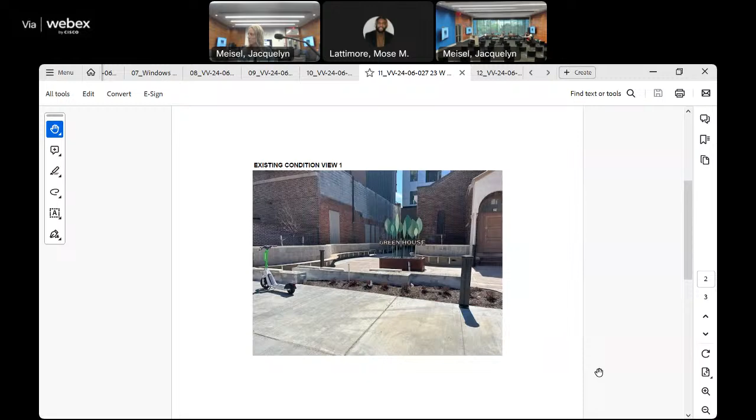Commissioners at the business meeting wanted to know what was planned for the portion of the wall above the brick. They preferred to review items holistically and wanted to know what the whole wall would look like. The applicant confirmed that no additional work is currently planned for the elevation on 951 North High Street where the murals are proposed, and submitted an additional email from Mr. Wood confirming that. Staff recommends approval of the application with the condition that a long-term maintenance plan is submitted prior to issuance of certificate. Basis for staff recommendation is City Code 3116.11, standards for alteration, and the short north design guidelines on murals.

Thank you, Kimberly. Can you state your name and get sworn in? Jessica Sharon. Do you agree to tell the truth and nothing but the truth? Yes. Perfect. Hey Jess, hello, good to see you all. Good to see you as well. Thank you for staying again. No doubt, thank you again.

So staff, I think everything is answered now. I think the only thing is just this long-term maintenance plan. Yes, I think we can submit something. We've done on some of our other mural projects, like a clear coat, which is probably something we could have the artists do. It's pretty easy for them. It's literally a clear spray paint or clear coat, which I think does help prevent some UV washing of the mural.

Something like graffiti, we'd probably have to handle on a case by case basis by having the muralists come back out, but we can put some of that in writing and send it over. I would just want to talk to the artist, but I don't think that should be an issue. If there's something specific you've seen in the past, that'd be helpful, but if it's just how we're going to address some of those things, that's okay with me. So nothing specific, but it's in the short north design guidelines to have the maintenance plan, so I wanted to be consistent with the guidelines.

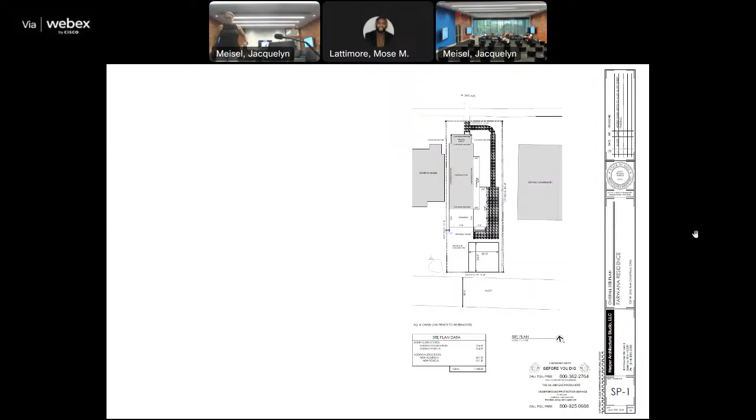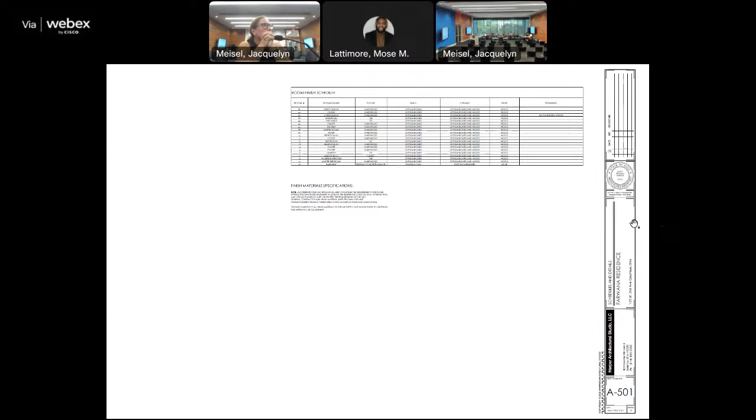All right, moving on to our final application, number 12. This is 135 West Second. The addition to the house and some landscaping elements were previously approved as part of COA 22-22-05-04, approved June 8th of 2022. The application at hand is to expand the house with 2 additions on the east and south elevation. Landscaping includes planting arborvitae along the east property line, laying a paver patio and installing new fencing, as well as a conceptual new construction of a new single-story two-car garage.

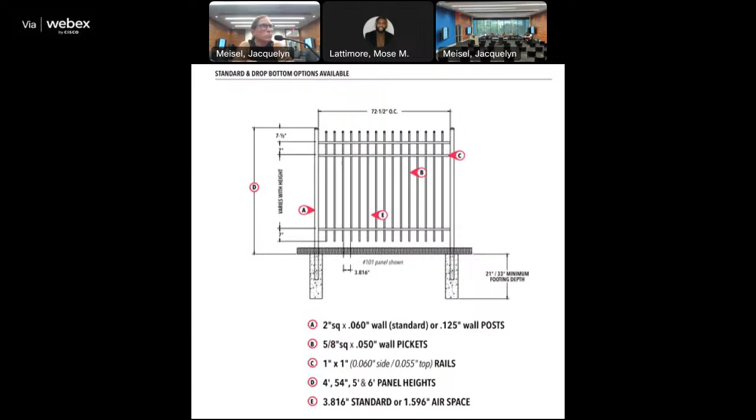Proposed to, I've got it on here as vinyl siding, but I think we had previously discussed Hardie board with an asphalt shingle roof. I will let the applicant clarify that portion. And a 6-panel man door on the east elevation. Commissioners at the business meeting requested all cut product sheets for the materials, even if previously approved.

They want to ensure that the approved material remains consistent. They also requested a scaled measured section through of the existing front porch from soffit to ground, needing to be submitted. The applicant did note that the front porch is existing and there's no additional work being done to it.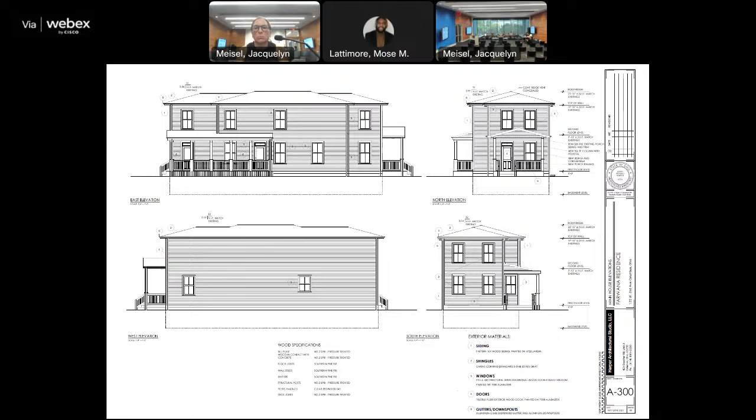The application was previously approved, and there's a minor change to the column spacing on the east elevation, which HPO supports. Staff does recommend splitting the application into A, approving the exterior building modification for the two additions, and B, continuation of the landscaping and garage to allow applicant to submit the cut product sheets and finalize the designs. Basis for staff recommendation is City Code 3116.11, standards for alteration, 3116.12, standards for construction, and City Code 3116.13, standards for site improvements.

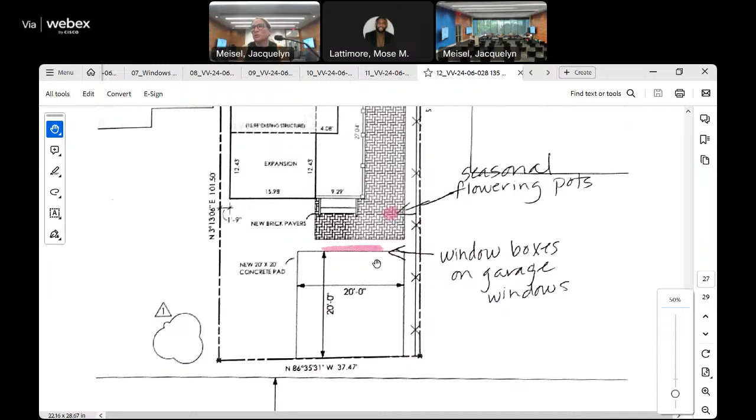Perfect, thank you. All right, so anything that you want to clarify? No, I just bought the house. And I understood that the plans had already been pre-approved and that we were ready to go, and I don't have any intention of changing anything that you've already received.

Okay, just a little bit to make sure you understood what staff was asking. I think Kimberly was asking about the garage. Yes. And do you remember talking through the garage versus the siding? Yes, I mean it'll be compliant with the list, obviously, and match the house.

Okay, and then any improvements or site improvements as far as the site plan? I know that you mentioned arborvitae and the materials, but I think they're looking for a plan to be able to evaluate that against. Okay, I think there's a plan for it that shows the paver patio already.

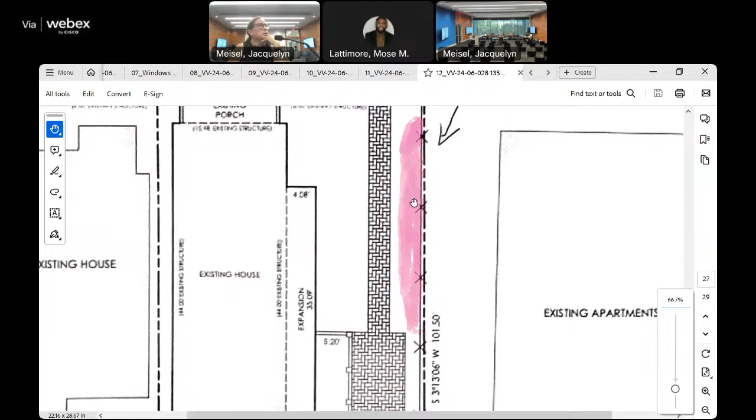And then there isn't much space to add a tremendous amount of landscaping. So that pink line, I was just going to add some arborvitae there because the existing apartment is so close. I was just going to add some of those tall, thin plants to create some kind of natural barrier, but nothing that would obstruct the view of the street. And there is a tree there already that I'm hoping to preserve.

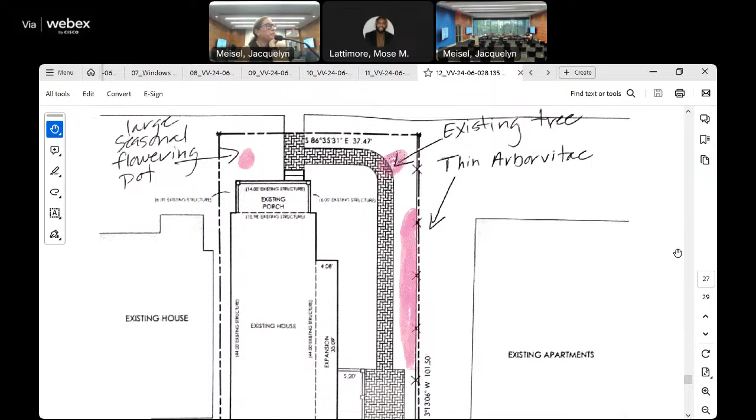Okay, that's very helpful. Anything else? I don't think so. Okay, so I think I was asking about the front porch, just gotta think about that. I thought it was being new. So I understand, I saw a note that says rework the existing porch. Yeah, and I think the railing is new.

There was a section through the railing, so I think we would be remiss with this amount of work being done if we left the porch untouched, at least improved in terms of making sure it's maintained, but they are doing that. So I think that's been addressed, that was one of the comments I had at the business meeting.

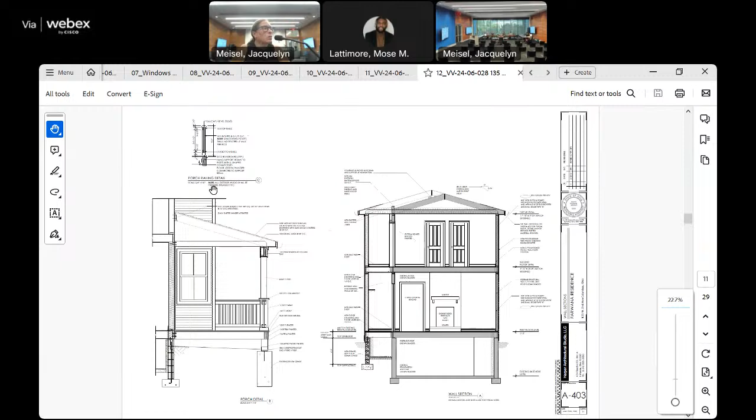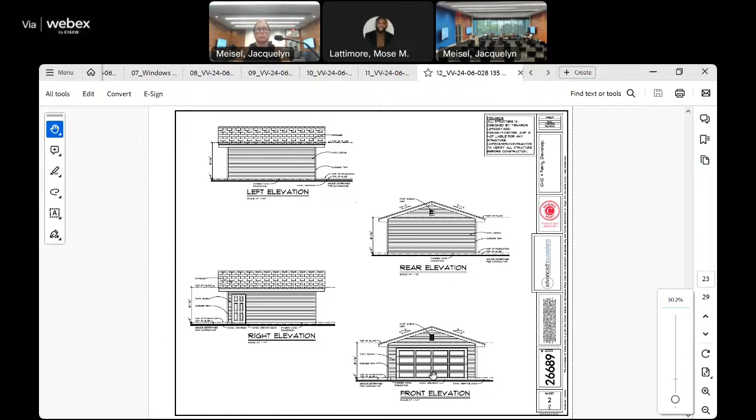Okay, so no issues on the front porch anymore. I think the staff was just offering a thought on the garage because of the clarity of the siding, so it makes sense to table that as item B. I don't know if we've really given any feedback on the garage to date, and this is the first time we've seen it. Correct. So if the commission would like to do a conceptual review and give that kind of feedback, I think that would be beneficial.

Agreed. I mean, you did talk a little bit of things over with the applicant, but just to have it on the record of the official meeting. Okay, all right, so that'll be the garage.

And then as far as the clarity of the site plan that's been offered, Kimberly, do you need more? Tim, do you need more? Or is there enough here to just kind of talk through? That would pull that out of item B.

I think we would at least want to know what the paver material is, and the point about that existing tree, similar to the last application, understanding the drip line canopy of that and interaction with pavers over top of that could compromise the tree. The proximity of the arborvitae to that could compromise that tree. So that'd be helpful to understand just in rough dimension. Show that outline, not just the trunk, but the outline of the tree.

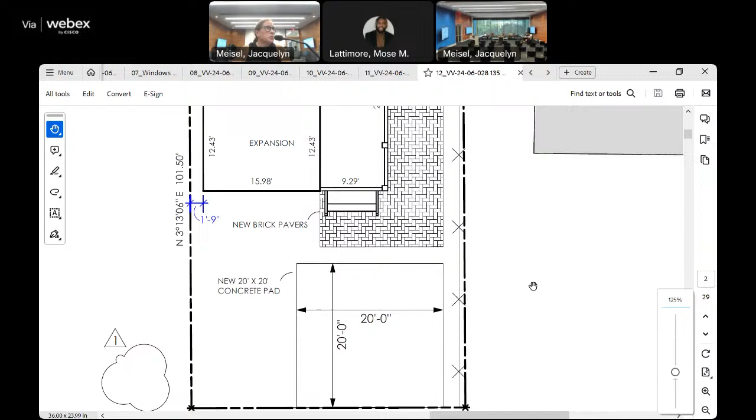And I would also, maybe in concert with the review of the garage, there's a gap between where the pavers stop and the garage. So what's the intention, to create a connection there? Just clarification on that would be helpful. Yes, I mean my intention is to create a connection there.

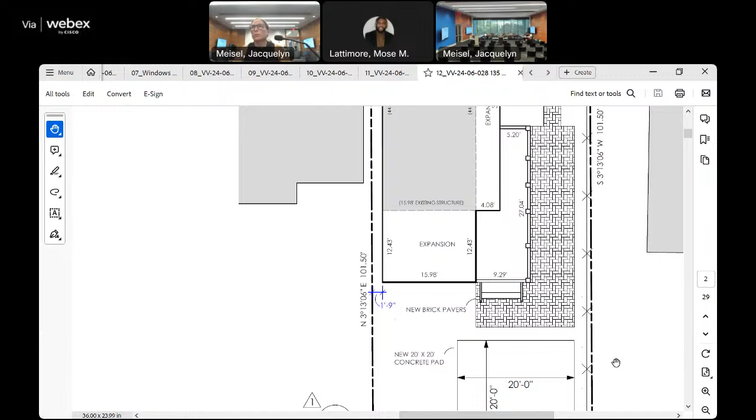So while we're talking about that, that was the site plan, so it seems like we're going to do item B as far as pulling the garage and the site out. I think site improvements, that's clear now. Revising the site plan slightly to address some of Tim's comments.

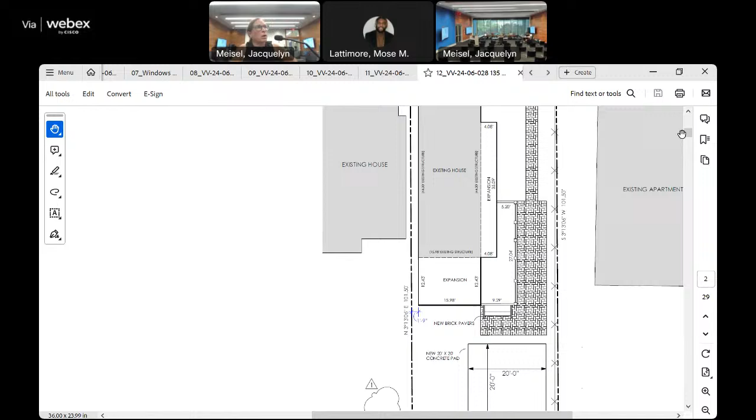I noticed the fence detail that's shown, is that for adding onto the existing fence? No, there's an existing chain link fence that will come down, to be replaced with fencing. I submitted the detail on the fencing.

So is that just along the one property line where the existing fence is, or all the way around? Right now the chain link fence goes all the way around, and my intention is... Maybe try to clarify that on the plan too, even if it's just highlighting the extents of the fence.

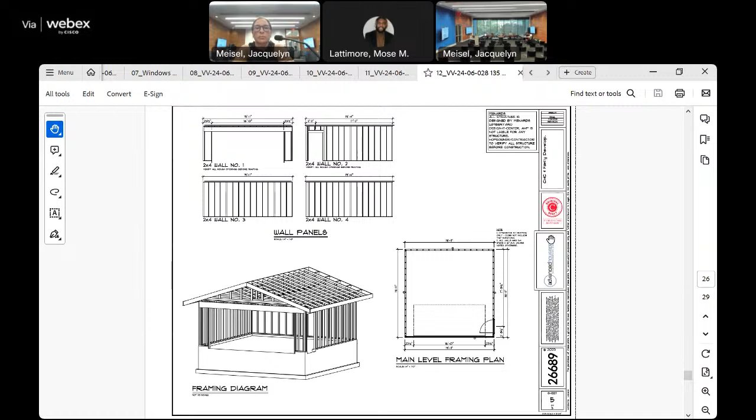Awesome, so we took care of the site improvements. Can we open up some conversation related to the review of the garage that is new? Typically we'd encourage 2 one-car doors rather than 1 two-car width door. I would also encourage hip roofs rather than gables, to be consistent with the house.

The contractor that submitted the drawings for the garage is not the same person who made the original architectural renderings, and I think that's where the confusion is. I just needed to submit something to get on the schedule, and I don't think he realized he was just giving me something random. Obviously the garage is intended to match the house, be very consistent with the house, same materials and everything.

There's also a note on the site plan that there ought to be window boxes on the garage, but the garage— that was conceptual, I know. I was telling the contractor what I kind of originally was hoping for, but...

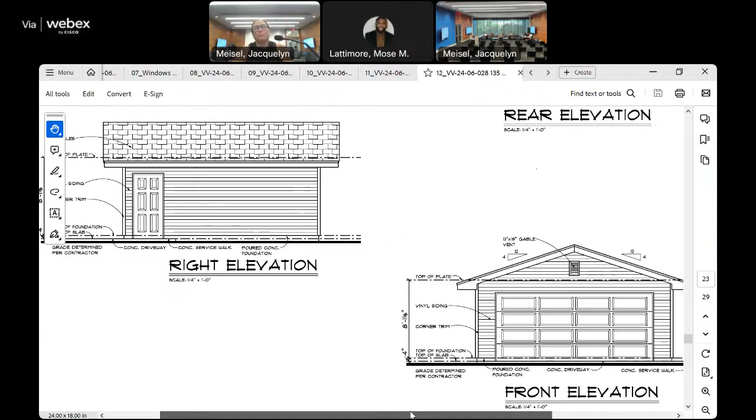That's what I'm wondering, is it possible to separate this into 2 different projects? Okay, that's what we're gonna do. We're gonna take the site improvements and the garage and move it to item B, and allow that one to continue so you can keep developing it. Then we'll take the house itself and move it to item A, to let that move forward.

Is the eave dimensional on the garage? See, that's what I'm saying, these drawings were just a standard 2-car garage. I'm actually not using this contractor. I was originally going to, and now I've decided I'm not going to.

So I think it would probably be important to just have a new set of drawings done that match the house, that are consistent. These were just something he did for somebody else. I said I need drawings for the garage, and he submitted this, and now I'm like, this isn't what we're doing.

Is there any other feedback that you need from us? I think you understand what we're looking at, trying to accomplish with the review. Yes, and I want what you want. Yeah, we all want the same thing. I want to bring it back into its original grandeur.

In respect to the garage and the footprint of the lot, I'm almost contemplating a 3-car garage with three separate doors. And if that's the case, it would kind of fill in that back area. Otherwise there's just this vacant piece that doesn't really serve a purpose.

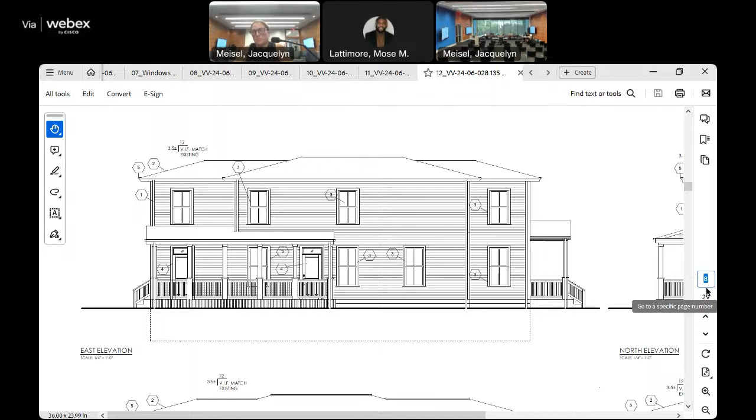Item B, which is the remainder of the application - the garage and site improvements - to be continued. Motion on application VV 24 06 028 part B, 135 West Second Avenue, to continue that part of the application for the site improvements and the garage. Is there a second? Second. All those in favor say aye. Aye. Any opposed? Perfect, so that part is continued.

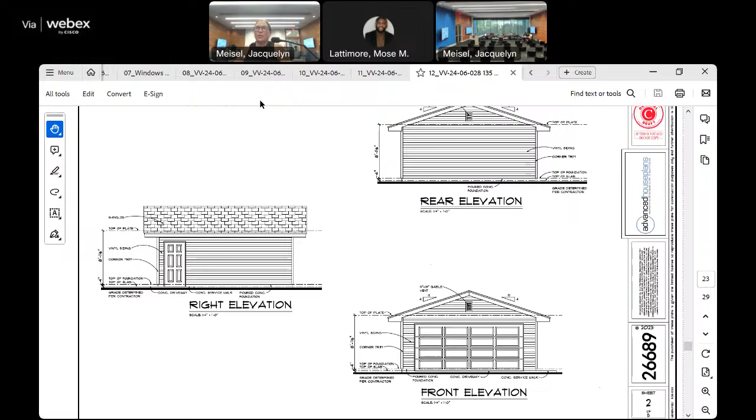So I'll be in contact with you if you'd like to be on next month's agenda. You do have a week from today, just so you know, in case I'm a little slow getting feedback to get part B. If you can't get it in a week, we can always aim for it.

Okay, what's the next step now to get your permits? So I will stamp the drawings for the additions, and I'll issue that COA because that's part of it. I'll send that to you - take that with your application for downstairs. Thank you so much.

Anything else? No, not today. I would have said something about Jeffrey at the end, thanking him for his service - that 27 years is absolutely great. I know he stepped away, so we had to at least say something. He had originally told me his hard stop was 6:30, so that was a little bit of a surprise, but it was good.

What are you here for, just out of curiosity? I'm so sorry, I'm here for solar panels. I did not know I was supposed to present something - I think we messed some stuff up. I don't have anything on the agenda for solar panels. That's okay, so what address?

1062 Mount Pleasant Avenue. I believe that might be - is that in the town? That's the town, yeah. So the town's hearing was actually yesterday. Okay, that is all right. Is it the same type of spiel where I'll have to talk about stuff? Yes, same format. Okay, I will be prepared for that. Thank you, and slightly different staff person. That's fair. If you were on yesterday's agenda, she'll probably be in contact with you next week - she's out of office for a couple of days. Cool, no worries. Have a good day, everybody.